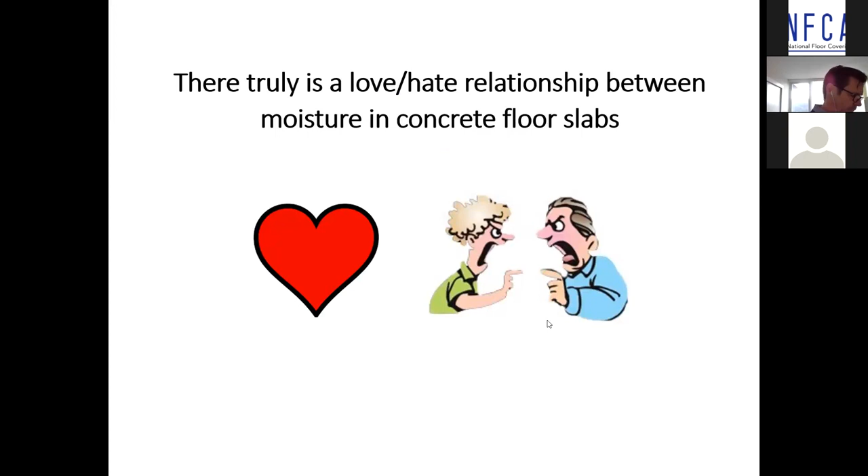Here to talk to you about the love-hate relationship between moisture and concrete floor slabs. There really is a love-hate relationship between the two. So let's first talk about the love.

We love and we need moisture in a concrete floor slab. Why? We need moisture to hydrate or harden the cement particles in the mixture. We also need water to render a concrete mixture workable, placeable, pumpable, finishable. And we need moisture or moisture retention to effectively cure a concrete slab.

Unfortunately, we have also learned to hate the very same moisture in concrete floor slabs. Why? Because moisture that's within the slab or departing from a slab can result in a vast number of undesirable conditions. On the left, you see mold growing underneath a vinyl composition tile.

You can see adhesive breaking down beneath a carpet tile installation that was out in Oklahoma, slab curling, and so on and so forth. And I'm trying to move that, Chris.

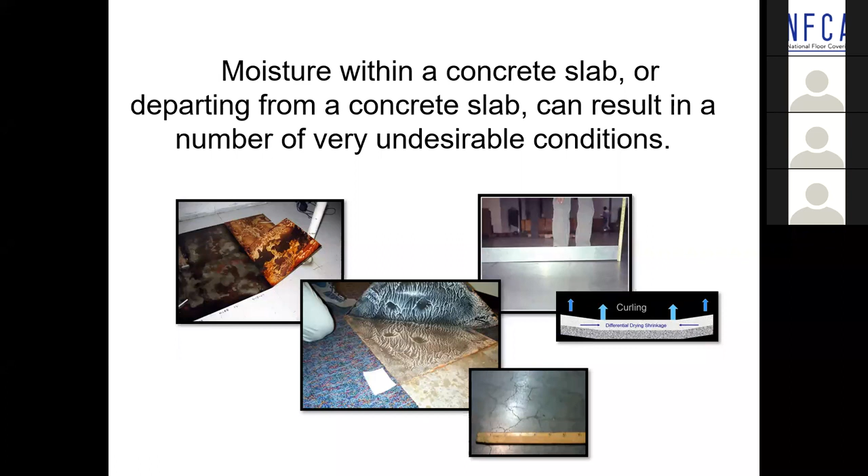One of the worst problems for the floor covering organization, its members, manufacturers, installers, and owners as well, are the negative problems that moisture can have on floor covering and coating.

On the left, you're seeing delamination of a flooring system that was down in Pennsylvania. The shot in the middle is a health clinic down in Fort Lauderdale, Florida, where the adhesive is broken down.

It's literally swimming. Now, when most people look at that picture, what do they say? They say the adhesive is reemulsified, but I want you to know that is not always an accurate statement.

We took water-based adhesives and coated stainless steel strips of metal. If you allow the adhesive to achieve its proper degree of set, and then immerse that coated strip of stainless steel into pH neutral water, pH 7, neutral distilled water, it doesn't reemulsify.

I'm getting some background noise from somewhere. You take that same specimen and put it into pH solutions 10, 11, and 12, and you begin to see it slide off the metal, giving the appearance of reemulsification when it's really breaking down, not necessarily reemulsifying just because there's water there.

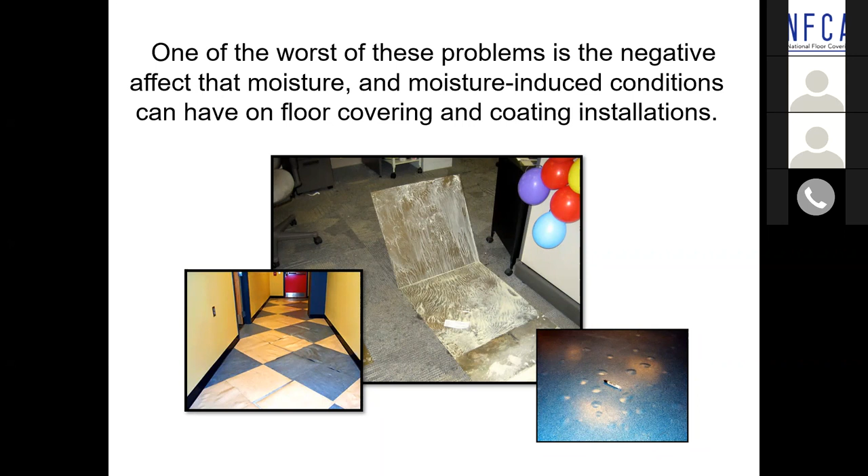And the bottom right picture is an epoxy floor. It's not only the coating of flooring materials or flooring industry that's experiencing problems. The polymer industry, people who manufacture and install epoxy floors, urethane floors, methyl methacrylate floors, are having very similar issues with moisture.

So, because concrete loves and needs moisture, let's take a few minutes and talk about concrete. What is it? Basically a composite material comprised of four basic components: water, sand, stone, and cement. This mixture of four ingredients, done properly, hardens to produce a stone-like material.

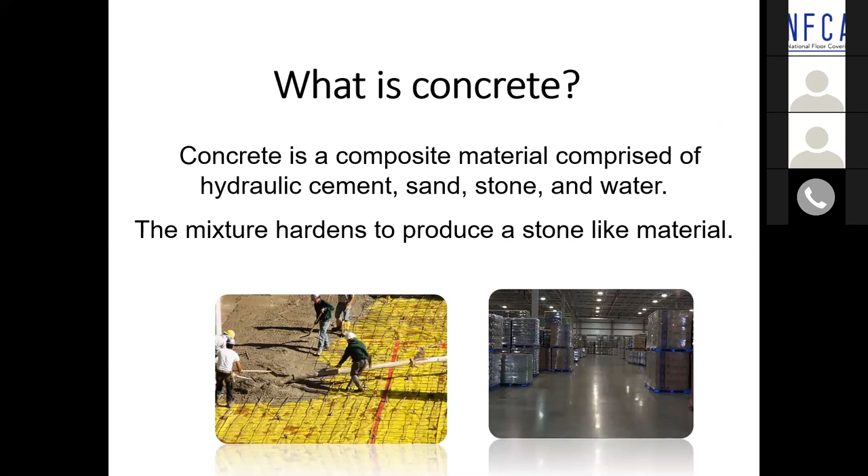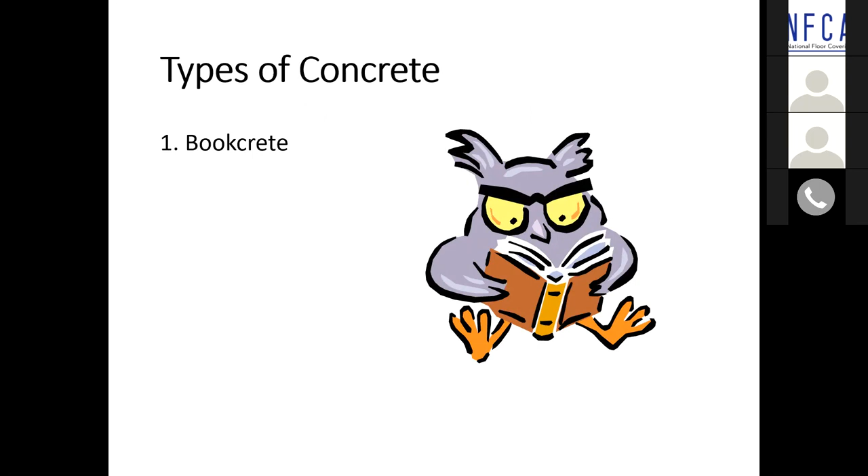Pretty simple explanation. There are, however, four types of concrete. There's the concrete that you read about, hear about, and study. There's the concrete that designers and researchers can create in the laboratory.

And then there's the realcrete, which sadly can sometimes differ significantly from what the design mixture was intended to be or what we were hoping it to be. But there's another type of concrete. The fourth type is the type nobody wants to know about, nobody wants to experience, and that's called legalcrete.

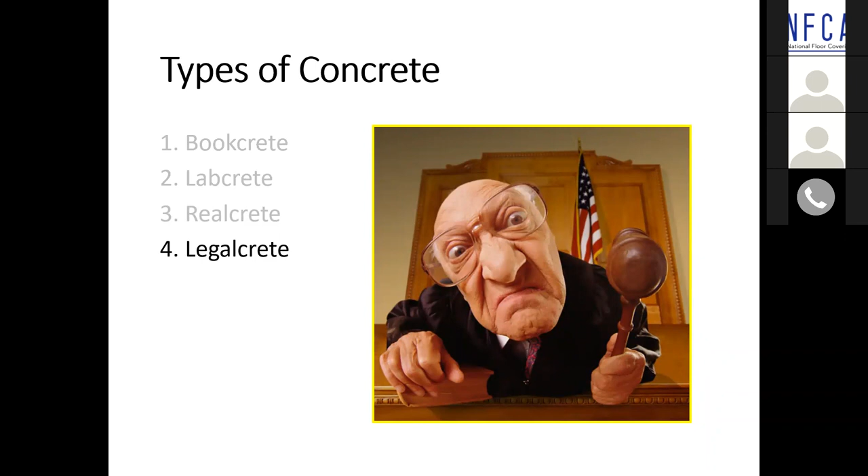I am now a one-man consulting firm. I had over $80 million worth of flooring lawsuits over concrete slabs in just the last 2 years alone. It's estimated that this issue is a $300 million to $1 billion issue in the United States alone. Add Canada and other parts of the world, and it's still a very, very huge issue.

Now, we need the water. We love the water because if we didn't have water, moisture in concrete, concrete wouldn't become concrete. We need it for hydration. Without moisture, water, and concrete, the cement particles wouldn't harden. Without water, we couldn't get the stuff out of the truck. It wouldn't be workable, it wouldn't be placeable. We couldn't pump it, and we certainly couldn't finish it.

And curing, the last thing. Curing, by definition, is the maintenance of temperature and humidity for a specific period of time in order for the concrete to achieve its design physical properties.

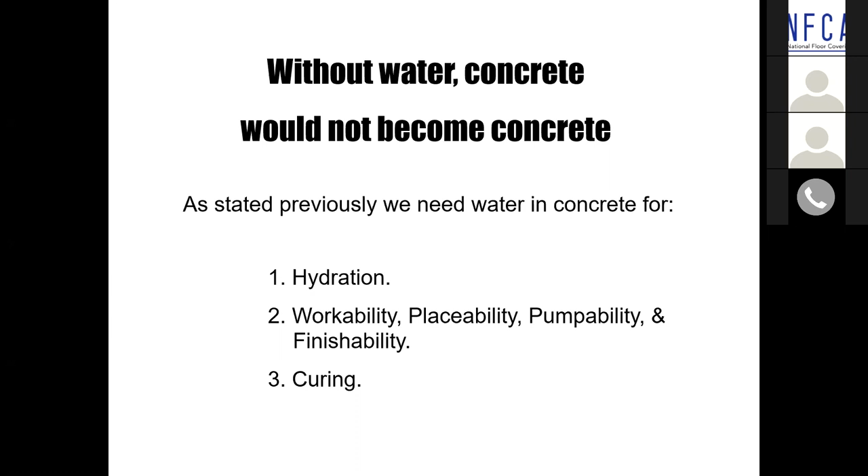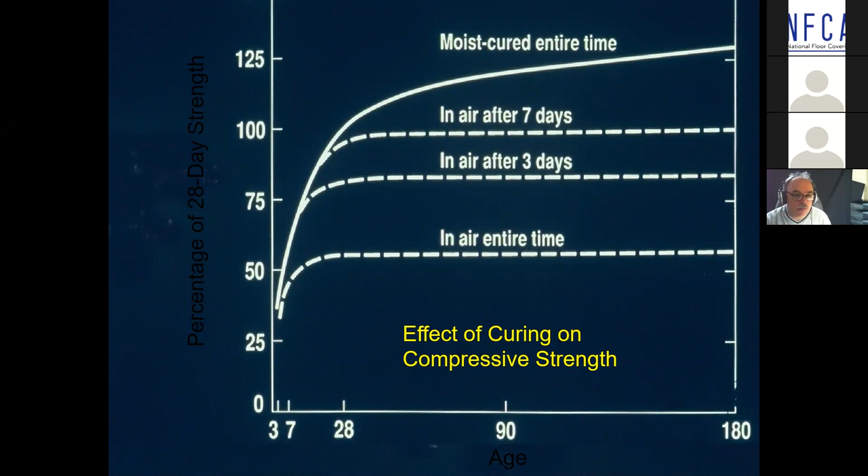This is where the idea of a 7-day curing period comes from. If you properly cure concrete by one of a number of methods we'll talk about, and retain that moisture within the slab for a period of 7 days, you will ultimately achieve 100%, or close to 100%, of its design physical properties, without question.

Now, what are the methods we use to cure concrete? Well, if concrete could vote, it would jump up and down to be water cured. But water curing, while a very effective method, isn't easy to do, isn't always practical, particularly on elevated slabs. And you absolutely have to avoid alternating wetting and drying.

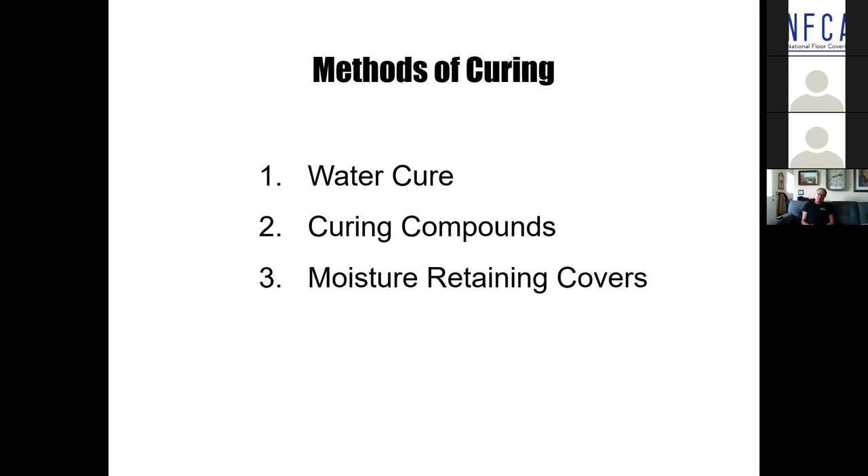I'm still of the opinion, because I've seen it happen, that when hydration takes over in the summertime, the temperature of that slab after it's finished can reach 120 to 130 degrees Fahrenheit. You hit that with 55-degree water out of the ground, and I've seen it craze and crack the surface of the slab.

So water curing isn't always the most practical way for curing slabs that are going to receive a floor covering or a coating system.

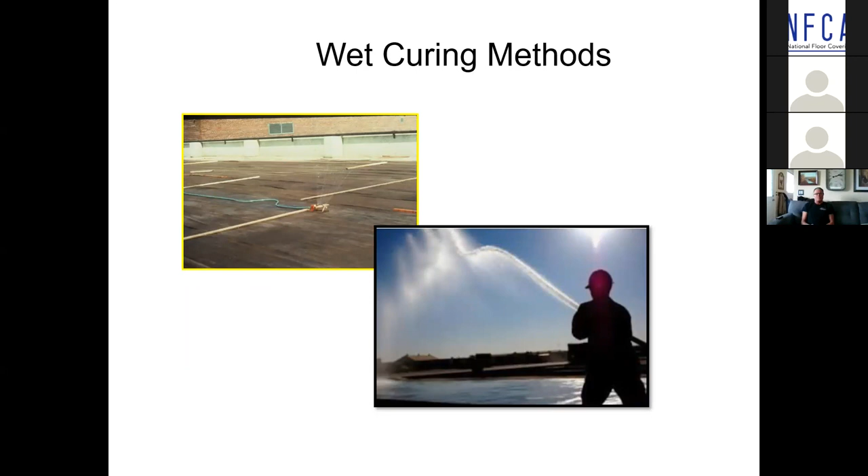Curing compounds: when I grew up in this business 45 years ago or more, curing compounds were the norm, particularly membrane-forming curing compounds. Why? Very inexpensive, very easy to apply, and they accomplish the curing. However, the ASTM F710 standard practice for preparing concrete subfloors to receive resilient floor coverings doesn't say not to use one, but it does say it's got to be removed, and that's very costly to remove.

Now, there's a class of curing compounds referred to as dissipating, but they don't just break down overnight. It takes ultraviolet light, takes abrasion. It could take 60 to 90 days for it to actually break down. As you're constructing the building and framing out the floors, anywhere there isn't significant traffic, that residue is still on the surface.

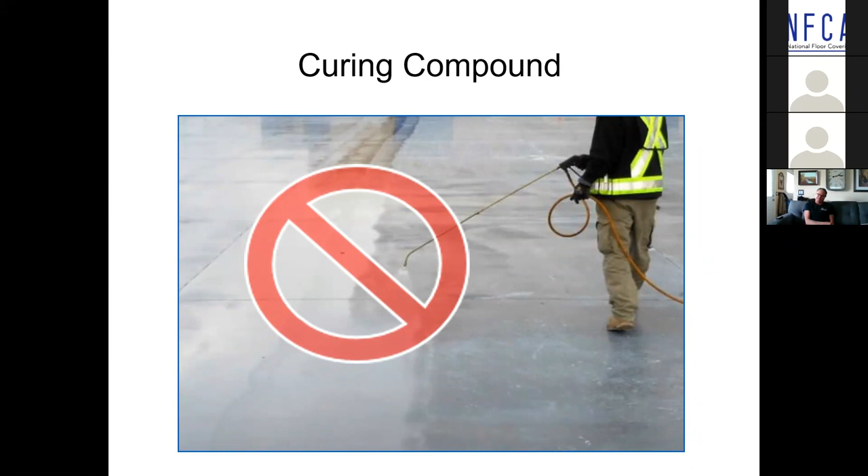So ideally, if you know ahead of time this is a floor that's going to receive a floor covering or coating, in my opinion it's far better to consider the third class of curing methods, which are basically just moisture-retaining covers. I've used dry, wet-strength curing paper for years.

It's also used in the more arid regions of the country, or in hotter, windy conditions. It's a composite material of fabric and poly where we just wet the underside of the fabric, dampen the surface. You're not continually adding water—it's a one-time thing, and it works very, very nicely.

And the newer materials are lay-flat. Not that it's necessarily important for a floor that's going to get covered, but if you have a bare concrete floor and use regular poly with wrinkles, you end up with a mottled appearance on the slab, which is very undesirable and you can't get rid of it. So these new materials are lay-flat, though again, aesthetics aren't as important when we're going to cover it.

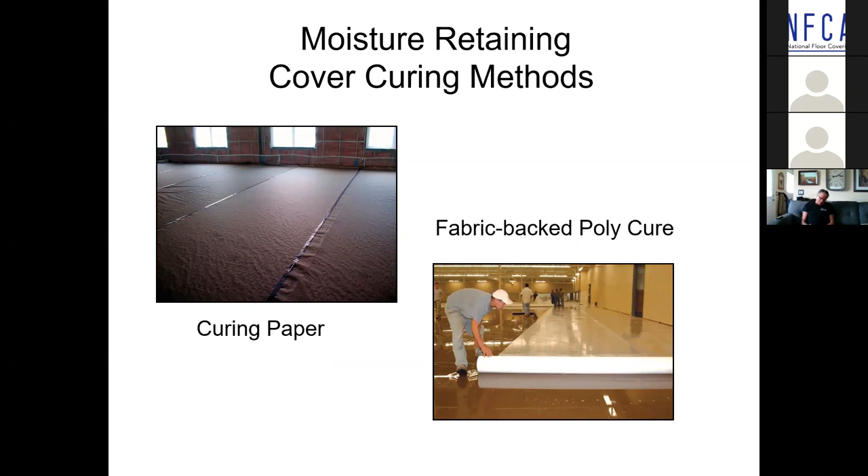So yes, we love and we need moisture for every one of those reasons. Okay, we've got to have it. We need it, we've got to have it.

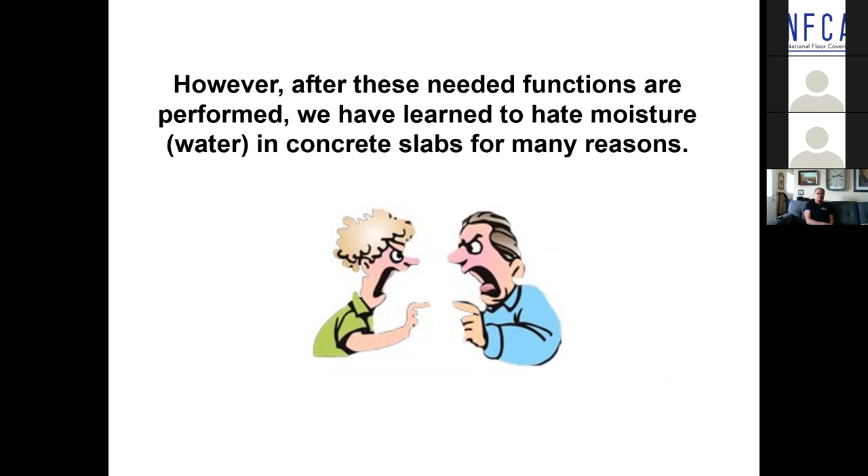However, after these functions have been served or performed, we've learned to hate that same water, that same moisture, for a lot of reasons. One, it can lead to very serious problems with floor covering materials and coatings.

The loss of moisture from a slab can lead to volumetric changes. Only half of the water in a yard of ready-mix concrete is necessary to hydrate the cement content. There is always free water, or water of convenience, in a yard of concrete to make it workable, placeable, pumpable, and finishable. If you only put in the amount of water necessary to hydrate the cement, you couldn't get the stuff out of the truck, and if you could, you couldn't do anything with it. So that free water occupies volume, and as it's lost through evaporation from the surface, a volumetric change takes place. This shrinkage can lead to cracking and to warping or curling of a concrete slab.

Moisture in concrete can also, if potentially reactive aggregate particles are present, feed a process referred to as alkali silica reaction, or near surface alkali reaction. These are aggregate particles that really shouldn't be in the concrete mixture, but it happens all too frequently. When those potentially reactive particles exist and there's at least 85% moisture in the slab, it's like fueling the fire. Ultimately, when ASR exists, a gel forms around the coarse aggregate particles, and that gel is expansive. It can take 5 to 10 years for it to begin to crack the concrete, but it does happen. We've also identified a similar condition with fine aggregate, occurring in a matter of months, called near surface alkali reaction, or NSAR.

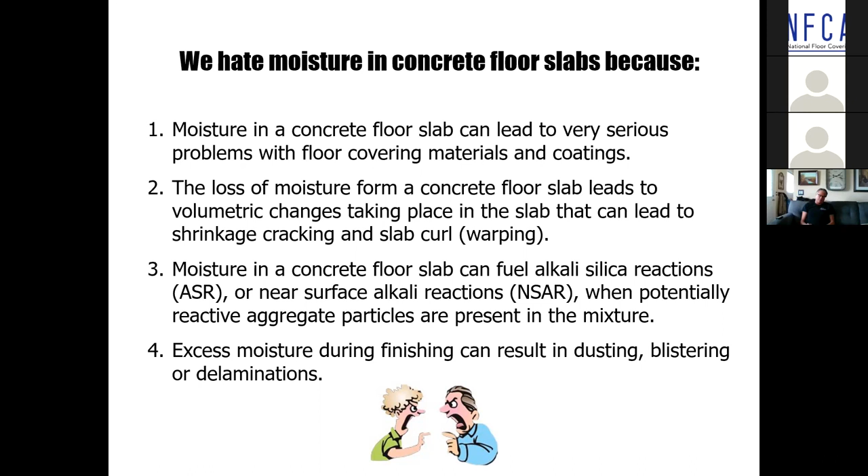Excess moisture during finishing can result in a slab that's dusty. It can also contribute to blistering and delaminations in the slab surface. I have two schools right now in Massachusetts where both have serious issues with delamination. I also have a 7-story hospital in Tucson, Arizona—7 floors of lightweight concrete, all delaminated half to three-quarter inches.

They've already spent $4.6 million dealing with that issue down in Tucson. So it's a huge issue. All right, let's take a look. Since we're doing this as a flooring organization, let's look at some of the common types of moisture-related floor covering and floor coating issues.

Why is that? It's the natural bleeding process. When you study the specific gravity of the four basic components in concrete, water has a specific gravity of 1, cement has a specific gravity of 3.15. What does that mean? In absolute density, cement is 3 times heavier than water. Your aggregates fall in the 2.65 to 2.85 range. What does all that mean? It means when those four components with four different specific gravities hit the ground or the deck, the heavier particles settle ever so slightly, and the lighter element, water, bleeds to the surface—but it's not pure water.

That water that rises to the surface—those of you who've placed concrete or seen it placed have seen that bleed water—but it's not pure water. It contains any chemical or admixture that's in the concrete, plus soluble alkalis. That's why, in every test ever done, you see higher levels of sodium and potassium ions in the top 3 millimeters of the concrete than you do deeper in the core. It's those alkalis that, when they go into solution, raise the pH of the concrete to a level that can begin to attack and break down the adhesive, and so on.

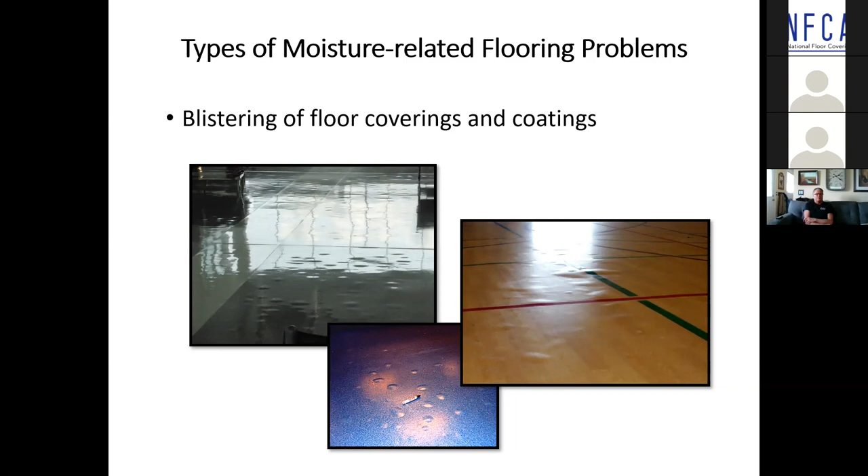An osmotic cell that develops in the surface region of concrete can reach 200, 300, 400, 500 psi, to the point that it can actually fracture the surface region of the concrete. Both of the pictures on the far left and the bottom show osmosis occurring in polymer flooring, and on the right side you're seeing osmosis that occurred because there is an epoxy system underneath that vinyl floor made to look like maple.

Delamination of floor coatings. This shot was a facility that first produced scanners for the airports after 9/11, a former Lucent Technology facility. They tested and the moisture levels were unacceptable, so they bought into putting down a 2-part epoxy moisture mitigation system. They started shot blasting the floor, 200,000 square feet, doing 15,000 feet at a time, moving across section by section.

As they moved across, the epoxy mitigation system went down, followed by a high build static dissipative epoxy. By the time they were about 90,000 square feet across and the first area was done, the operator was in there snapping chalk lines and setting up equipment, but brought the contractor over and said, what are all these bubbles? Time out, stop the process, start the investigation. But there wasn't time to do a proper forensic investigation.

All of that existing coating that was down had to be taken up, and another system was put down. That system got the facility open, and it was so critical because the government was serious about producing these scanners - if that facility wasn't open and producing scanners by a given date, the penalty was $400,000 a day. So they put this other system down.

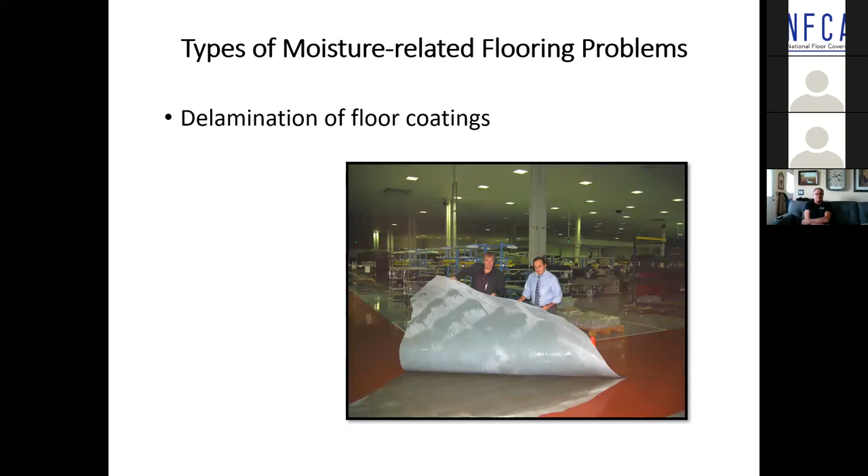The first company's system failed. They stepped up to the plate and wrote a check for $600,000. You learn a lot about who you're doing business with when you have a problem.

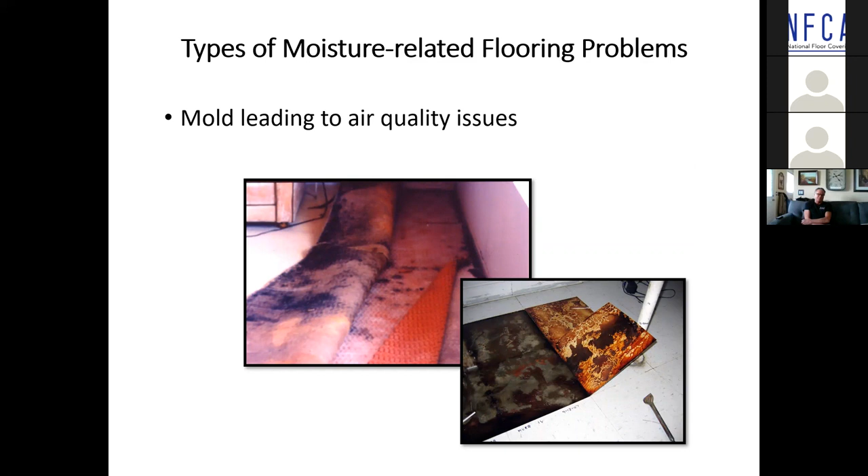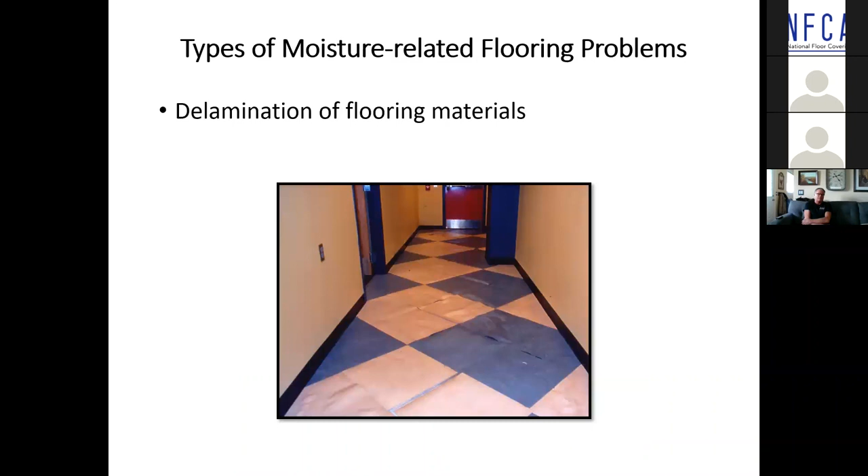Moisture can contribute to the development of mold, which in turn can become airborne and affect people's health - a very serious issue. Moisture alone can cause flooring materials to expand and delaminate. Here's a classic example - this is that same picture you saw a minute ago where you see raised blisters in a sheet vinyl made to look like maple floor.

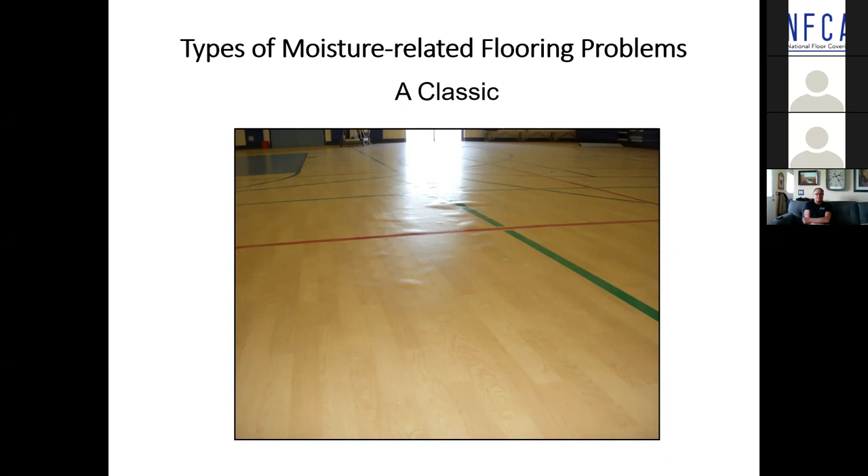What's interesting, my colleague, when we see these blisters, we typically find them to be fluid filled. What we would typically do is puncture that blister, take a syringe, draw the liquid out, put it into glass bottles with steel caps, wrap it in aluminum foil, and send it to the lab for chemical analysis. We did that, but my colleague couldn't resist it. He said, quick, grab the camera. And we call this Old Faithful.

It's not Photoshop. But the company who sold the mitigation system did something similar and used it in the lawsuit. This is one of the very few lawsuits that became a matter of public record - 95 out of 100 lawsuits that we get involved in, myself or other firms, you end up agreeing to non-disclosure in the settlements, so we can't talk about it. This one actually became a matter of public record, was in the newspapers, and so on. But the company who sold the mitigation system used a similar picture saying, we don't warranty for hydrostatic pressure.

In my deposition, when I heard that statement read to me, I said, what are they talking about? Hydrostatic - this was in Bakersfield, California, up in the mountains. The water table was several hundred feet below the surface of the facility. They didn't have 2 inches of rain the entire year. It had absolutely nothing to do with hydrostatic pressure. That company, who installed two different systems, this floor failed twice before it was properly corrected. They lost that lawsuit, and it became a matter of public record.

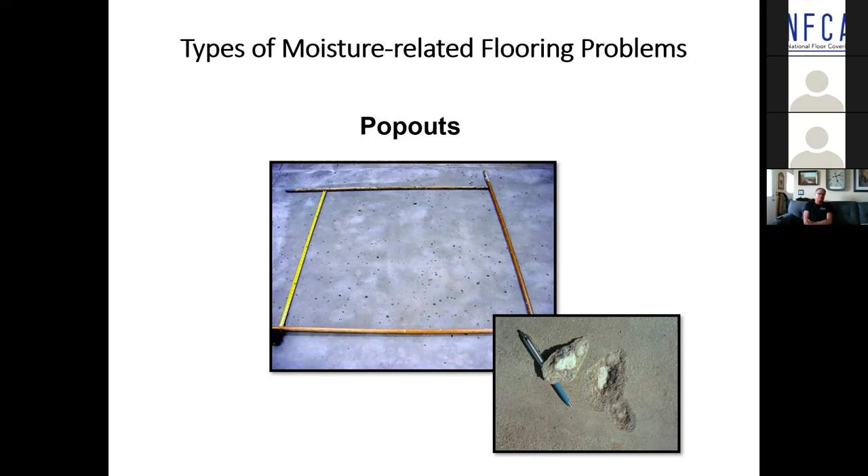Huge thing. We just talked about ASR and NSAR. I'm not going to go further into that.

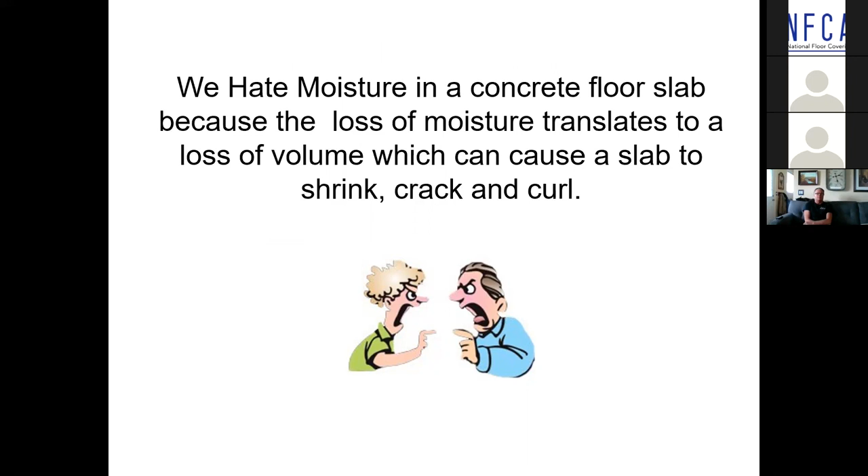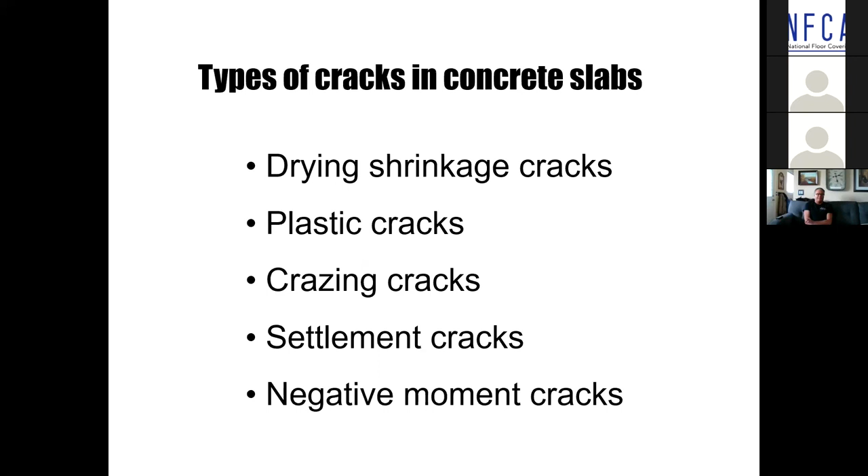We hate moisture in a concrete slab because the loss of moisture can create a volumetric change, and that can result in drying shrinkage cracks, plastic cracks, crazing cracks, settlement cracks, and negative moment cracks. Drying shrinkage is simply the loss of moisture; if there's no provision for it, the loss of volume creates a volumetric change, and the friction of the deck or the friction of the ground can cause the concrete to crack.

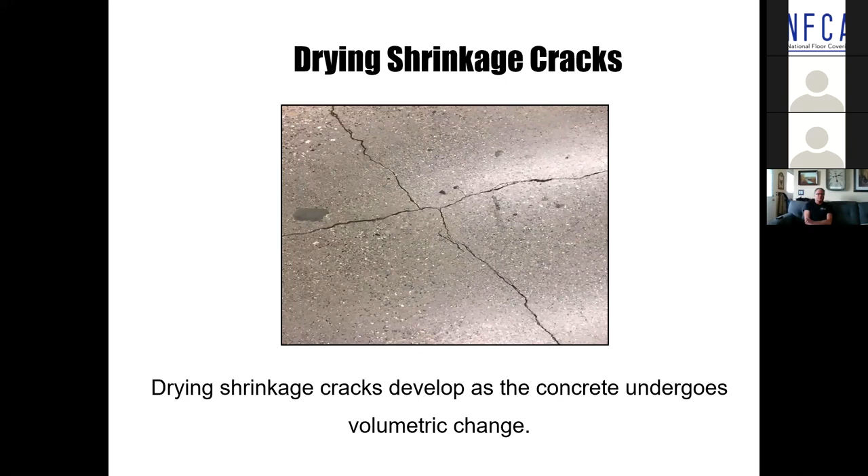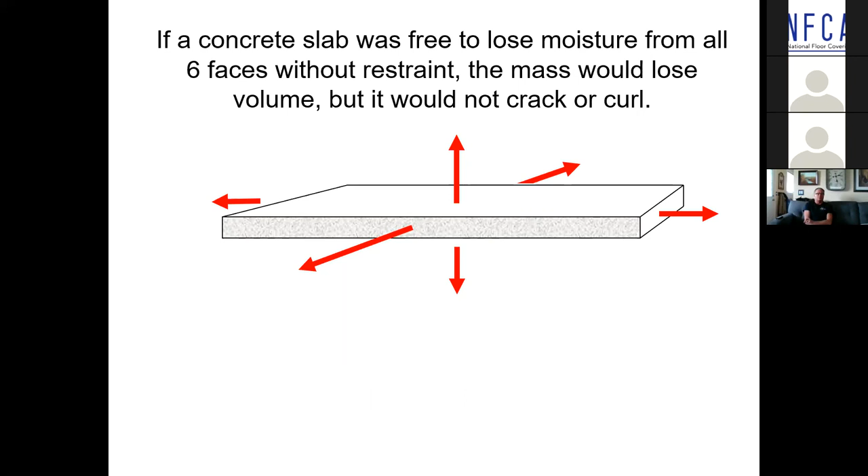Now, if you had a concrete slab that you could levitate into space such that it was free to lose moisture from all six sides, there would be no internal shrinkage stresses that would result in cracking. But because we place these slabs on the ground or on deck, there's the issue of frictional restraint. Even if we're on plastic, ultimately there's a measure of frictional restraint that can lead to a crack.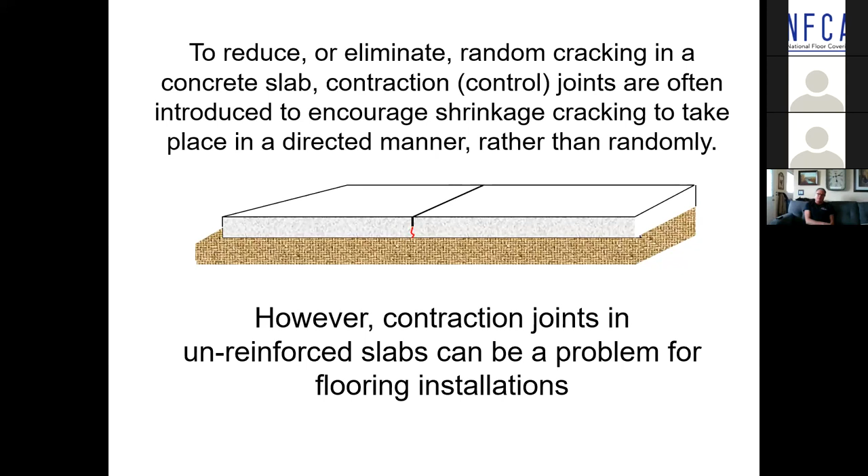So what do designers typically do? They typically put into the design control joints, contraction joints, saw cut at a given spacing. The problem is that if they haven't done their due diligence in understanding what can happen to a moving joint, or a joint that moves underneath the floor covering, it can be a real problem for a floor covering installation.

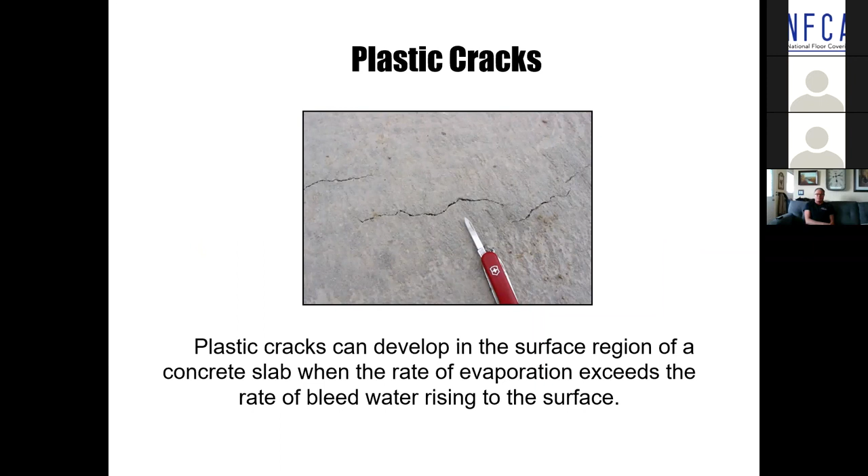Plastic cracks occur very quickly, while the concrete is still in a wet plastic state. You get a hot, dry climate with wind, and the moisture evaporating from the surface is not being replenished by the bleed water, which can lead to superficial plastic cracks. There are ways today very easily for a finisher, a GC, or a project manager to know whether they're at risk.

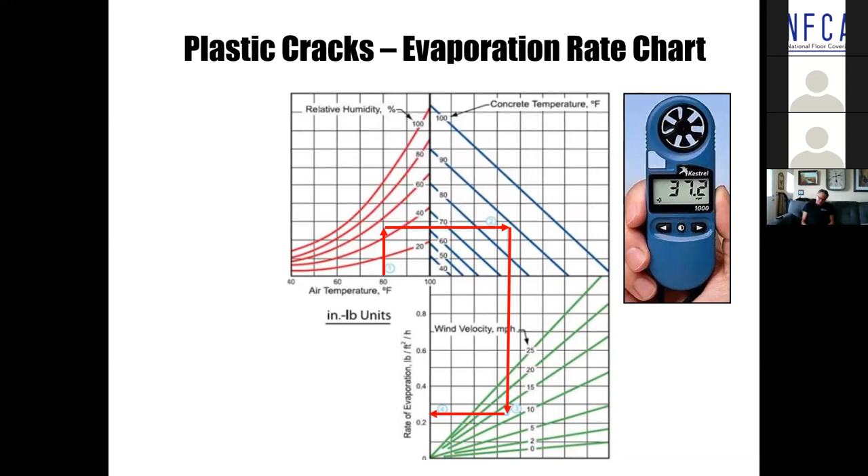You take the air temperature, compare it to the concrete temperature, measure your wind with this little handheld unit, and you can tell whether you're at risk. And there are things you can do. There are monomolecular films, not curing compounds, that you can spray on the surface to minimize the potential for plastic cracks to develop.

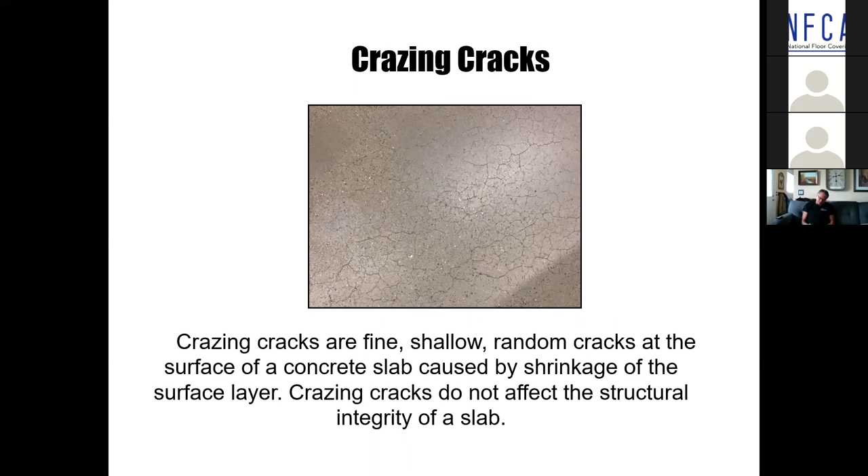Crazing cracks are not necessarily a defect. They're very unsightly, and a lot of owners panic when they see a crazed surface, but some of the best slabs I've ever seen in my life have been in place for 50 years and have that type of pattern.

Settlement cracks occur when the rebar is not properly positioned. Guys are walking on it while the concrete is beginning to set, walking on the rebar mat, and you can get a crack over the rebar. And it's very common for negative moment cracks to develop on elevated slabs where there's flexure in the decking itself, and you get a fixed object like a beam or a joist, you can end up with a crack over the top of the slab.

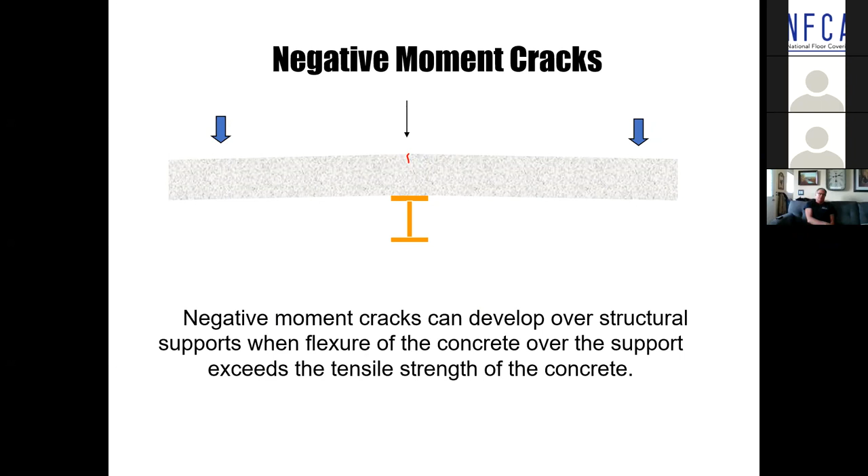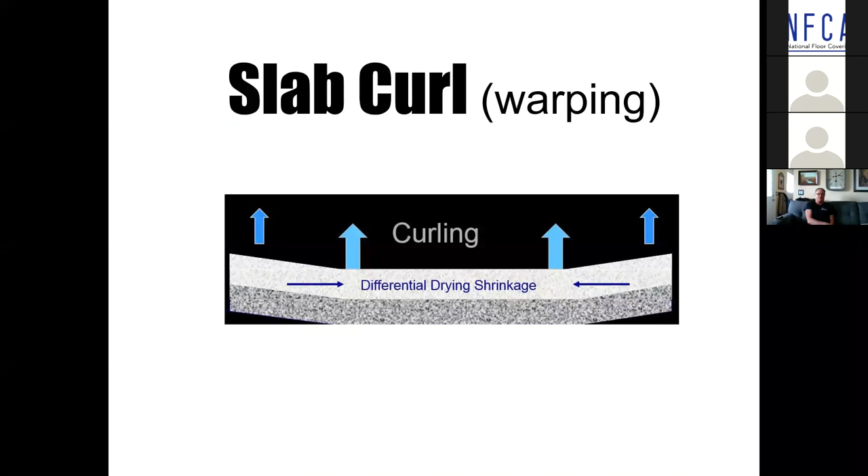It's important to know which type of crack you're dealing with, as I'll show you later on. Probably the biggest concern, in addition to cracking, is slab curling.

Remember, this mass of concrete that's on the ground, here on a vapor retarder, half of the water in that concrete slab is not chemically combined and is going to leave over the course of time by evaporation. As long as that surface is open and continues to lose moisture, volumetric change is occurring at a greater rate in the upper half of the slab than in the lower half of the slab.

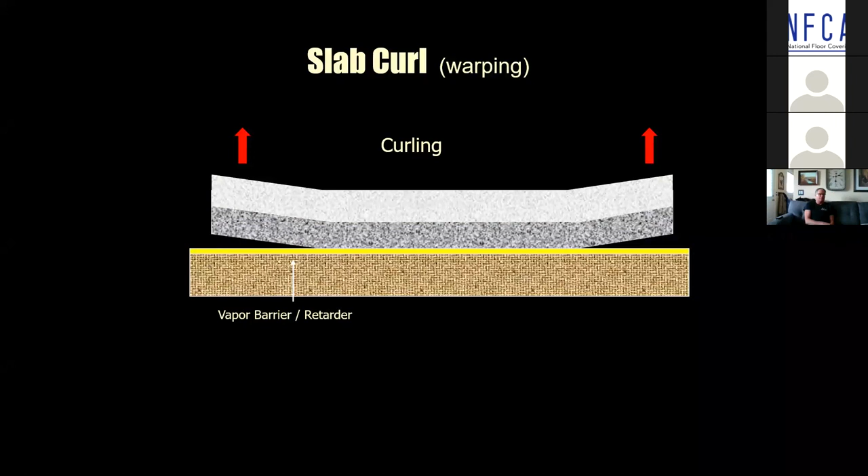And when this happens, the edges of the slab, usually about 3 to 4 feet each side of the joint, warp. It's a huge issue. How do you know if the slab is curled? Let's say you're doing a gymnasium.

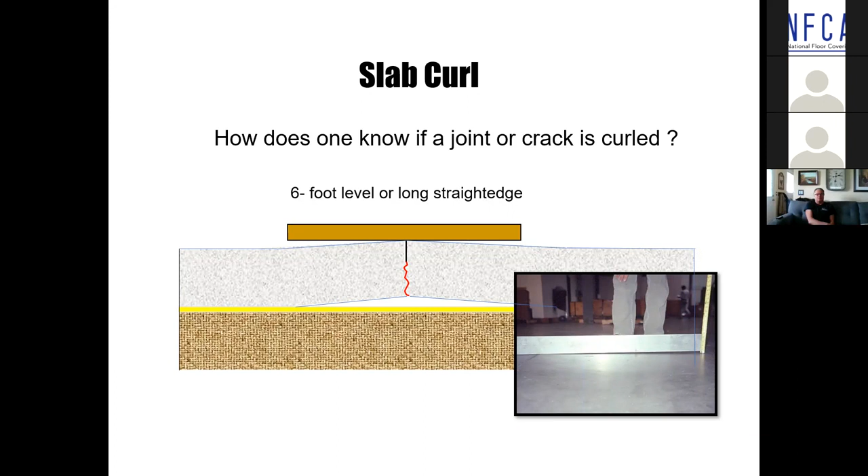You're the flooring contractor, and you're going to put the floor down in a gym. The concrete contractor finished the concrete, and it was measured and met tolerance. You come in six months later, and you put a straight edge over that joint, and guess what? The joint is now the fulcrum, and that six-foot level is teeter-tottering across that joint. You inherit that condition, and unfortunately you had absolutely no control over it, and maybe the concrete contractor didn't either. It's a design issue in most cases.

The stresses subside and it puts whatever's in the joint, whether it's a joint filler or semi-rigid material, into compression. You can see it in all three of these pictures, where the slab sections that were curled at the joints have now gone back down and put what's in it into compression. Here's what it looks like.

What's the standard treatment? More often than not, people come in, if they've checked the slab and it's curled, they grind the surface level, or in some cases use a leveling compound. But they forget or don't consider that if the joint is raised up, there's a void underneath that slab—a hollow area. Again, only back several feet each side of the joint, but it's hollow.

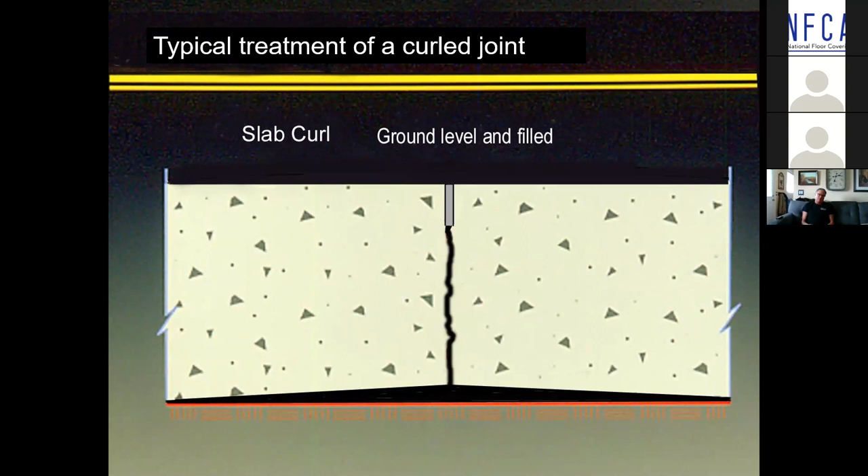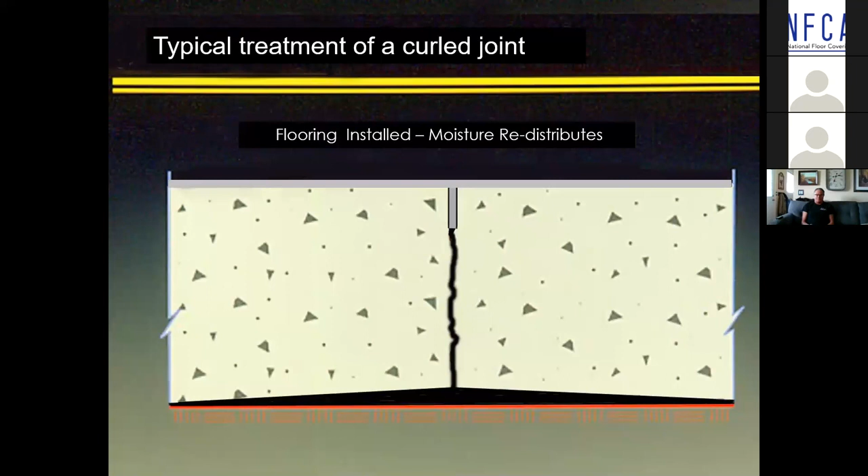Now you come in and put down a flooring or a coating. Moisture is always attempting to seek a state of equilibrium. And as it attempts to seek that equilibrium, it redistributes. As it redistributes up into the drier portion, the warping stresses subside, the slab sections go down because they're not being supported underneath, and it puts whatever's over that joint into compression.

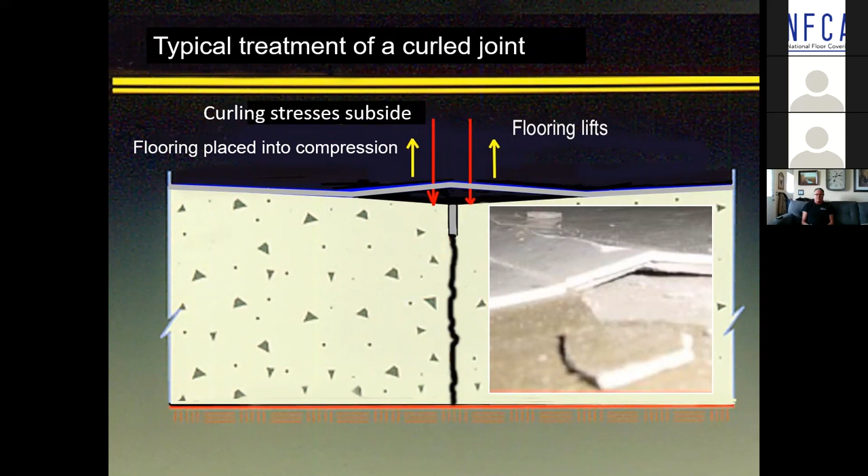Here's the worst case, where it completely buckled the underlayment and the flooring material. Same thing here—compressible floor material in the joint. Put it down, moisture redistributes, and all the joint lines telegraph through the flooring. A lot of you have seen that and may not have known it was related to the condition referred to as reverse curl.

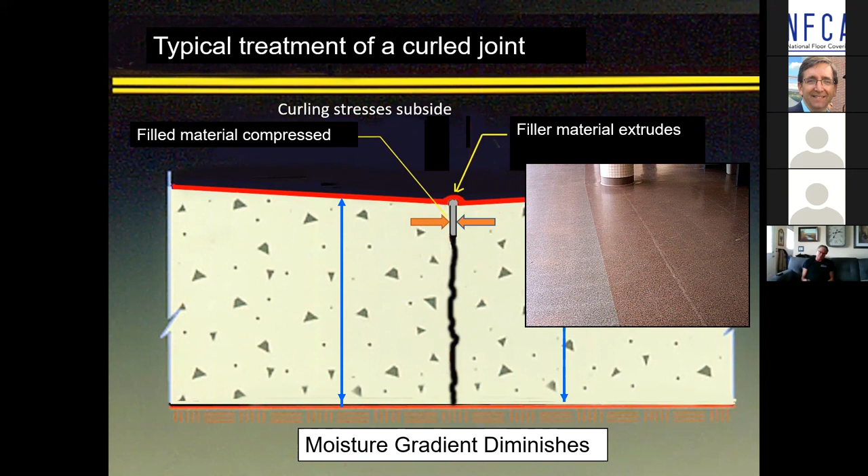It's a great opportunity—I can show you how to stabilize a curled joint in relatively no time at all, and a great opportunity for you to make additional money if you choose to do that. But please be aware, if you're going to put a flooring system down and you run that level across those joints and it's teeter-tottering, just grinding it level or leveling it with an underlayment material isn't necessarily going to solve the problem.

So it is absolutely critical to know how much moisture is in that slab and whether the level of moisture in the slab is going to increase or decrease over time, which leads us to how we make that determination: moisture testing.

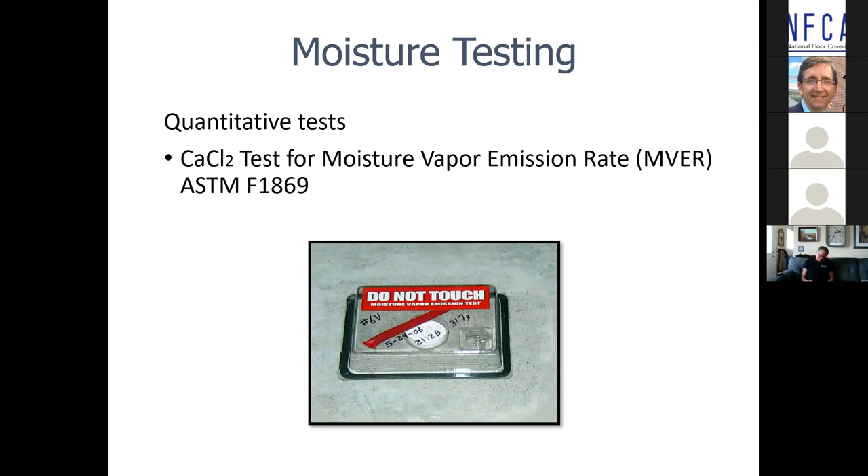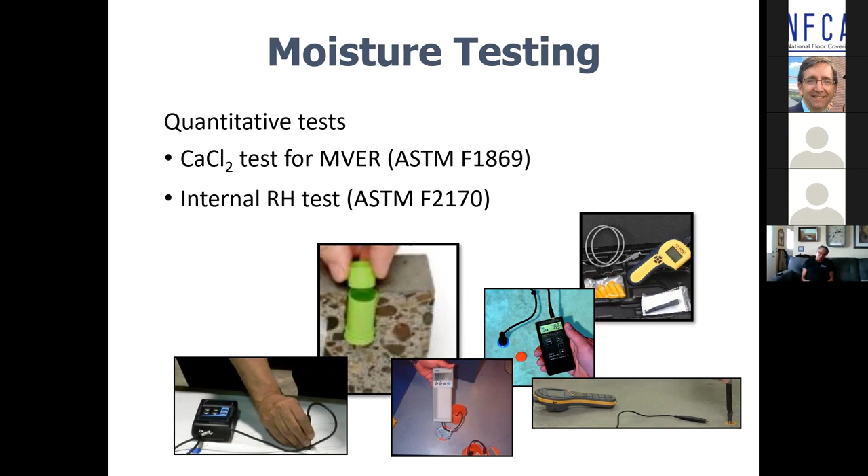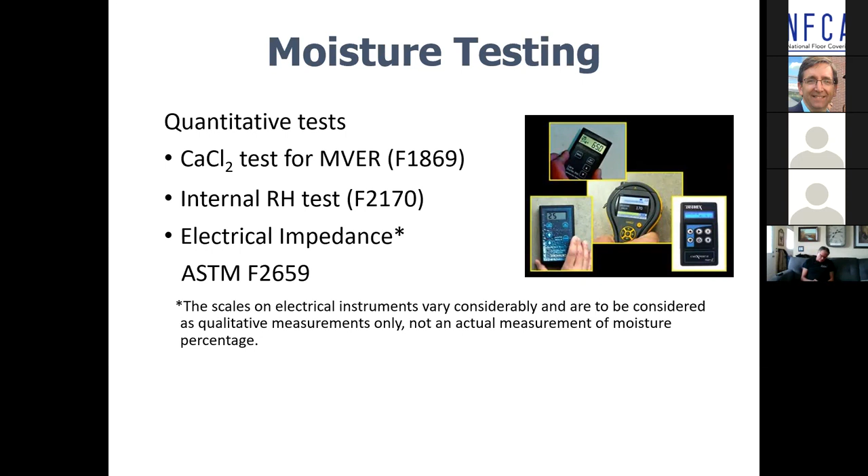The tests we perform for moisture fall into two categories: those that give us a number, and those that basically just tell us whether it's wet or dry. On the quantitative side, historically used for decades—going back into the 30s and 40s in its crudest form—was measurement of the moisture vapor emission rate by the calcium chloride method. In 2002, in the United States, we adopted the European method of measuring moisture in concrete floor slabs, ASTM F2170. We also introduced relative measurement of moisture by electrical impedance, ASTM F2659. Let's talk about the qualitative side.

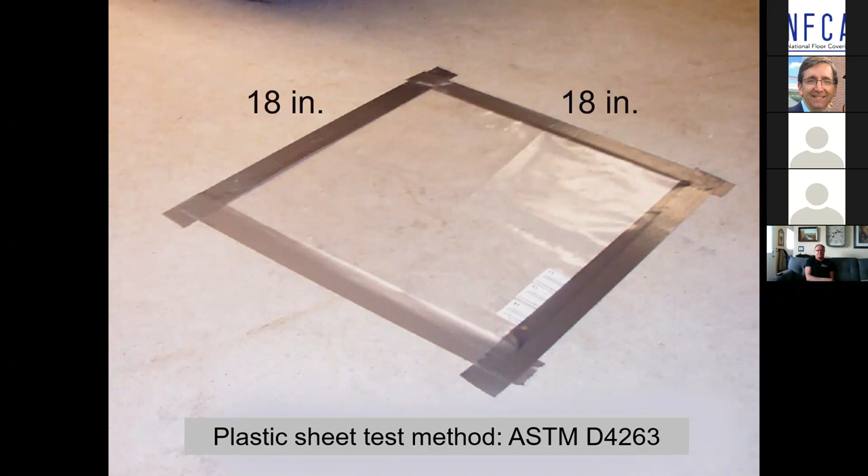For years, taping down a sheet of plastic over the slab has been used, and it's still a practical method of determining if something is wet or dry. It calls for taping down an 18-inch square piece of plastic, leaving it down for a minimum of 16 hours or longer, coming back, peeling back a corner, and seeing if you see a darkening of the slab or droplets of water on the underside of the plastic. If you see moisture under the plastic, do you put the floor down? Absolutely not. If you don't see moisture under the plastic, do you put the floor down?

Absolutely not. So what good is it? Well, here's a test that a general contractor can perform on their own.

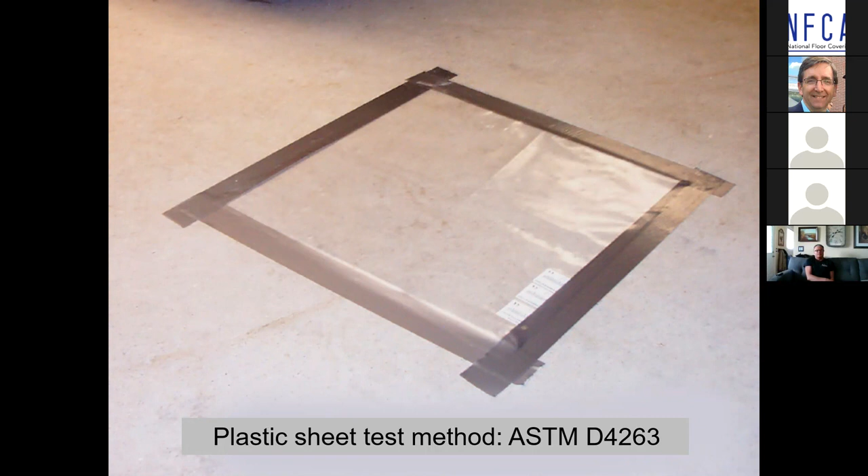Go out every week and put down a separate piece of plastic. Don't even think of calling anybody in to test the moisture until you stop seeing droplets or darkening. Why? It can take up to 13 pounds of emission to even show up under the plastic. So if you're seeing drops of water under the plastic, don't call in whoever is going to do the moisture testing, because you're just wasting your time and wasting somebody's money.

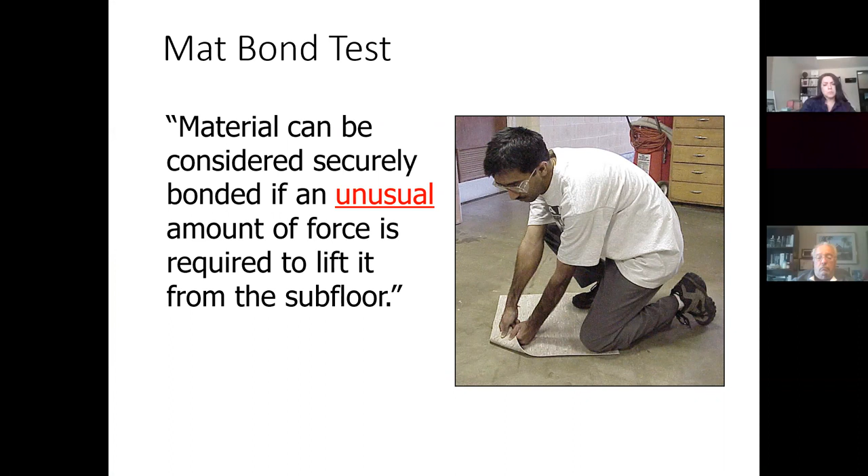Still on the qualitative side, we're actually at ASTM writing a new mat bond test where basically you prepare a mock-up of the concrete exactly as you're going to for the full project, clean it, prep it, vacuum it, spread adhesive, put the flooring down, roll it, let it sit for usually a week, come back, and see if an unusual amount of force is required to lift it from the subfloor. Well, unusual to who? There are ways of quantifying it that we use, but we'll see what the new standard comes up with.

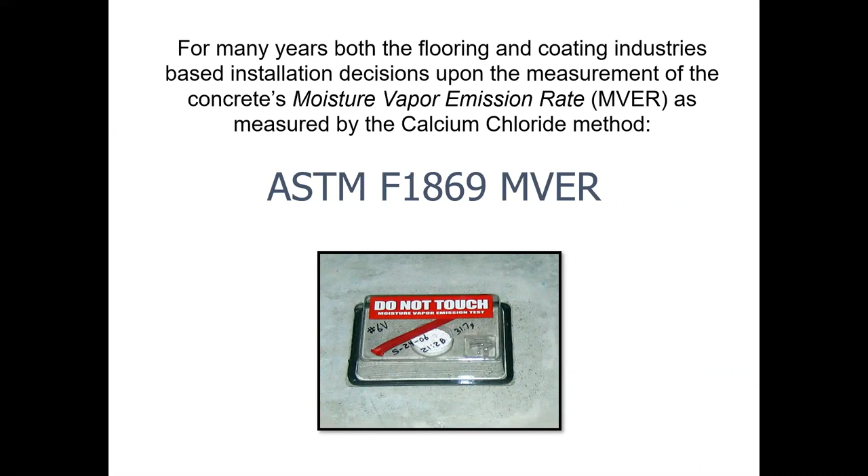Let's talk about calcium chloride testing and why it's fallen out of favor. It absolutely was the norm for decades and decades and decades. But what we've learned about it has caused us to accept that, quite honestly, if this is the only test you're asked to perform, or the only test you do perform, it's insufficient information to base the flooring installation upon.

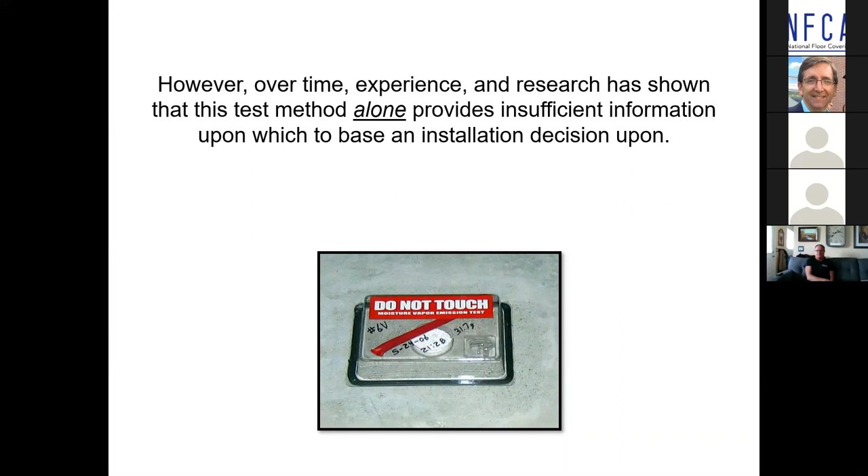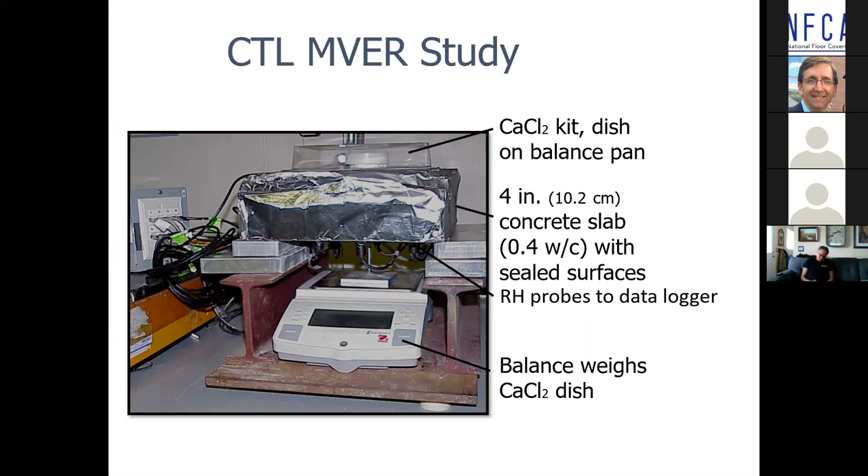Why? It's only telling us what's taking place in the top half to three quarters of an inch. This is a study that my friend Howard Kanare and my colleague Scott Tarr performed years ago when they both were at Construction Technology Laboratories in Illinois, where they took a 4-inch concrete slab and had humidity sensors embedded into that slab.

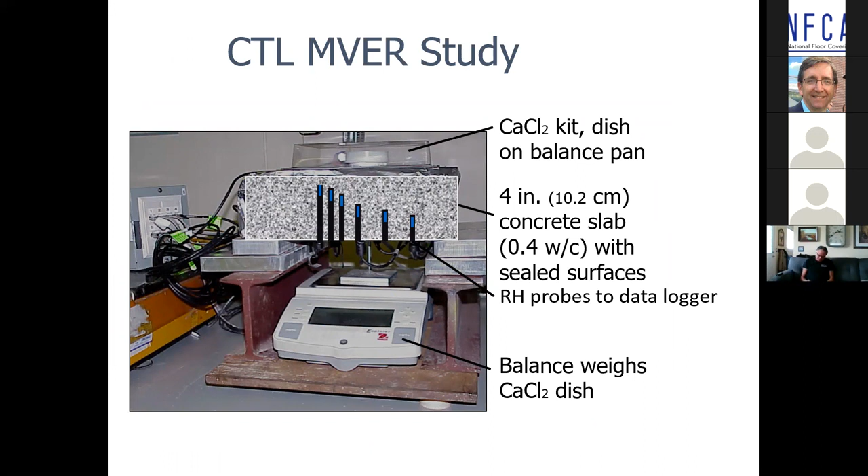What they were trying to do was determine where the moisture that you could see on top of the slab, a dish of calcium chloride pearls underneath a plastic dome, was coming from — either by emission or hygroscopic action. Where was it coming from? What they found was that it was only the top half that changed; nothing changed beyond three quarters of an inch into that concrete. So conducting a calcium chloride test is really just the tip of the iceberg.

I think it's still a valuable test. Alone, it's insufficient, but as a consultant, I want as much information as I can possibly get. If I'm asked whether it's safe to put a floor down, I want as much information as possible. But it doesn't tell the whole story. Underneath that surface is a potential reservoir of considerably greater moisture that the calcium chloride test tells us absolutely nothing about.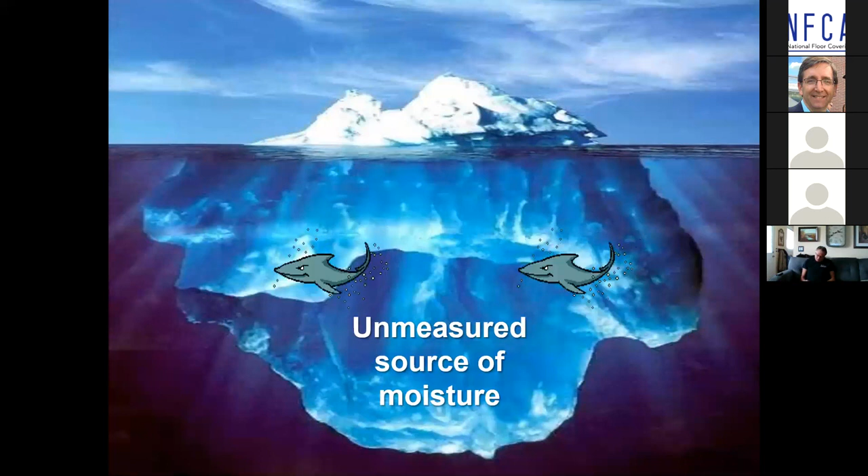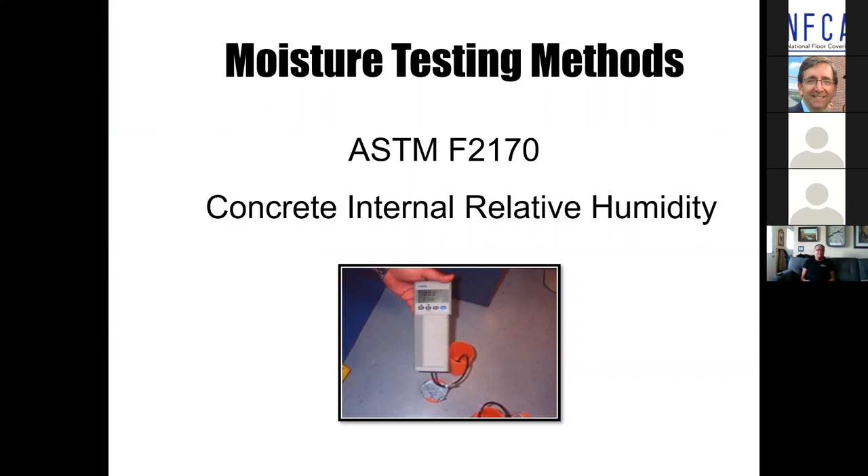That's why we adopted the European method. Most Europeans don't use calcium chloride — they have a calcium carbide test — but relative humidity testing is the norm and has really become the norm, at least in the United States. When that concrete hits the ground, day one, it's 100% relative humidity, top to bottom. No question about it.

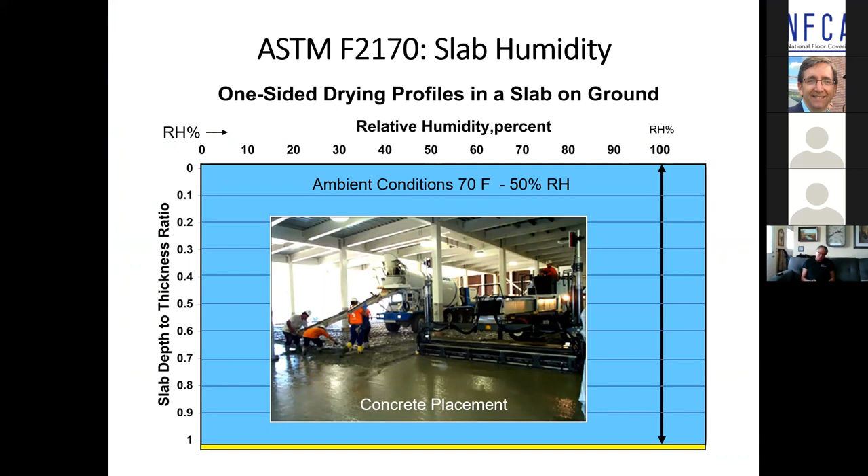Here we have an ambient condition of 70 degrees Fahrenheit, 50% relative humidity. So now, over the weeks and months that follow placement of that concrete — and I want to make a point here — all of these moisture tests presume there is an effective, low permeance vapor retarder directly underneath the concrete. If it's not there, the numbers you get are all subject to change. So with the vapor retarder in place, directly in contact with the underside of the concrete — not below sand or gravel, it's got to be directly under the concrete.

Ultimately, the surface region of the slab will equilibrate with the ambient humidity, in this case 50%. But as we go deeper into the concrete, the relative humidity increases. Now you come in and install your floor covering. As we talked about earlier with slab curling, that gradient will now reestablish itself as a state of equilibrium. But because we've lost a measure of moisture, that state of equilibrium will be at a lower RH level — in this case, 80%.

The research done at Lund University, headed up by Göran Hedenblad, who has numerous published articles on the subject, found that where the moisture gradient and the redistribution lines intersected always fell at approximately 40% of the slab thickness. What does that mean? It means that on a 5-inch slab, 40% of 5 inches is 2 inches. You take your relative humidity test 2 inches down in a 5-inch slab, and it predicts what the redistribution moisture level will be once the slab is covered — a great predictor of what's going to happen to the moisture level in your concrete after it's covered.

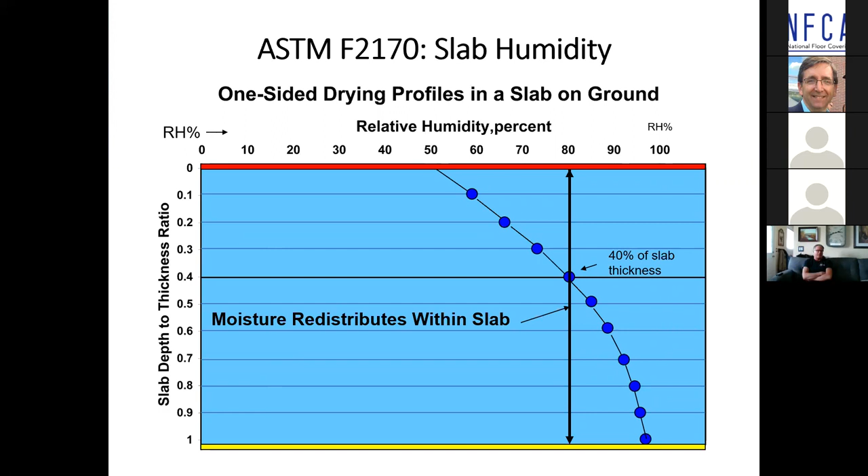Surface pH test, and this is a real difficult thing for me to talk about, because I and many of my colleagues on the ASTM committee believe that as a pre-installation test, pH testing is a flawed procedure. Why is that? Simply because we're introducing an external liquid source of water that may or may not develop in the concrete itself.

What is pH? It's the power of hydrogen. It basically is an indicator of acidity or alkalinity, on a 0 to 14 scale. It's not a measurement of the actual alkali content. There's a difference between pH and alkalinity. We don't have time to get into that discussion, but there is a difference.

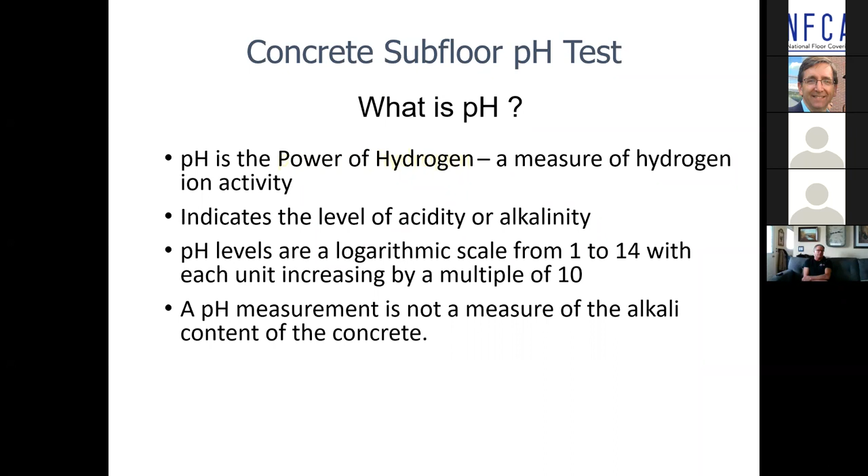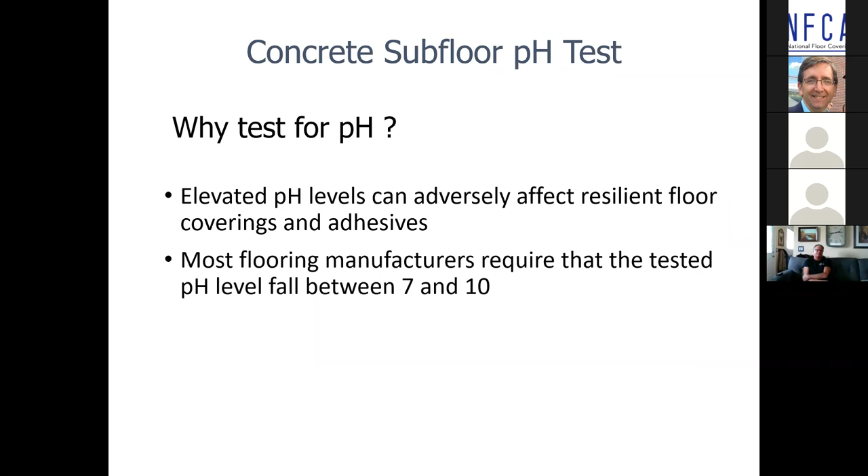Why test? Well, we test because there's no question that a high pH solution can break down adhesives and lead to flooring problems. No question about it. Most flooring manufacturers still require that it fall between 7 and 10. It's a measure of hydronium, hydrogen ions in solution. The point of that is if there's not enough moisture to create a solution, pH is not an issue.

If I take that pH strip and put it on the top of my desk and don't add water, I have no pH at all. If I put it on a concrete slab and I don't add water, there's no pH.

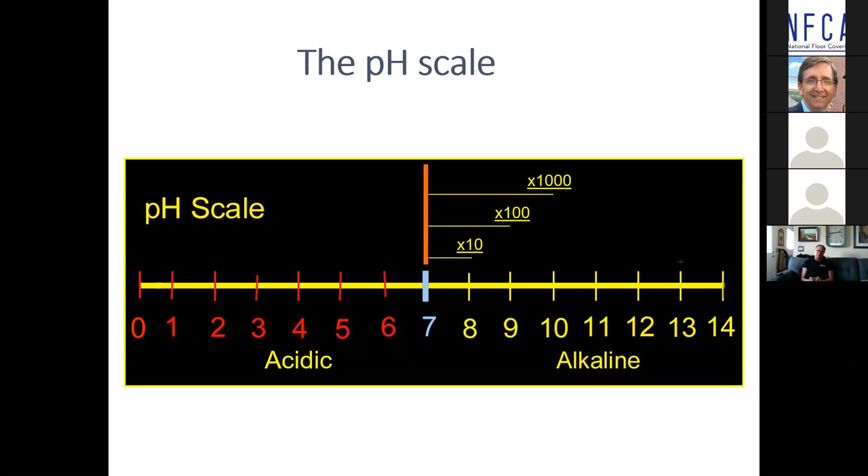We talked about it being a 0 to 14 scale. Distilled water, deionized water, pH is 7, but it's a logarithmic scale. When you go from 7 to 10, you're talking a concentration difference of 1,000 times. Concrete, when it comes down the chute, is always going to test—fresh concrete is going to test to 10, 12, 12 and a half, 13.

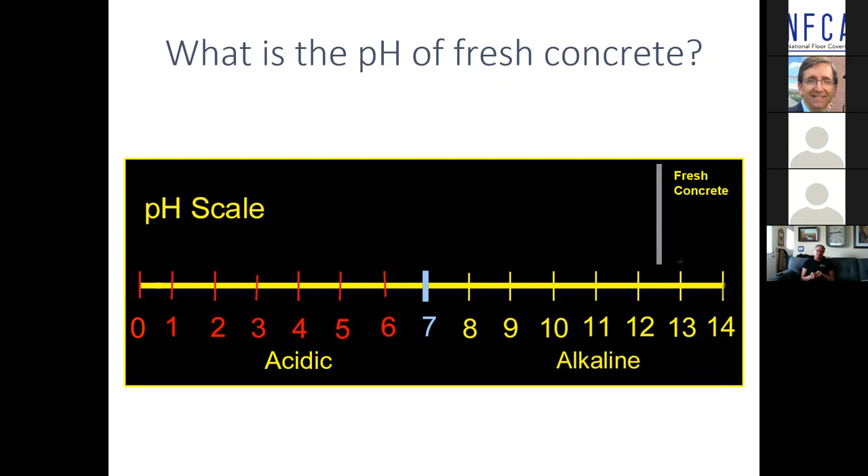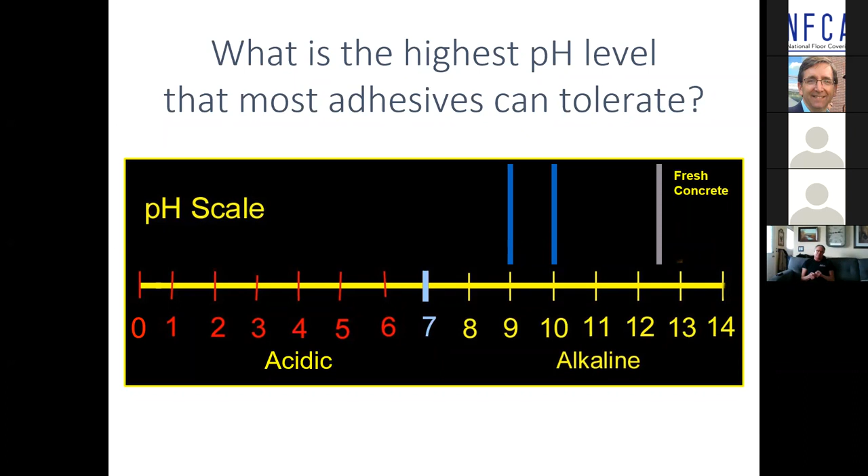What's the highest pH level? With most manufacturers, 9 to 10. So what's wrong with that picture? How can we have flooring adhesives that can only tolerate pH levels of 9, 10 going down over concrete, which, without apology, would measure fresh concrete at 12 and a half and 13?

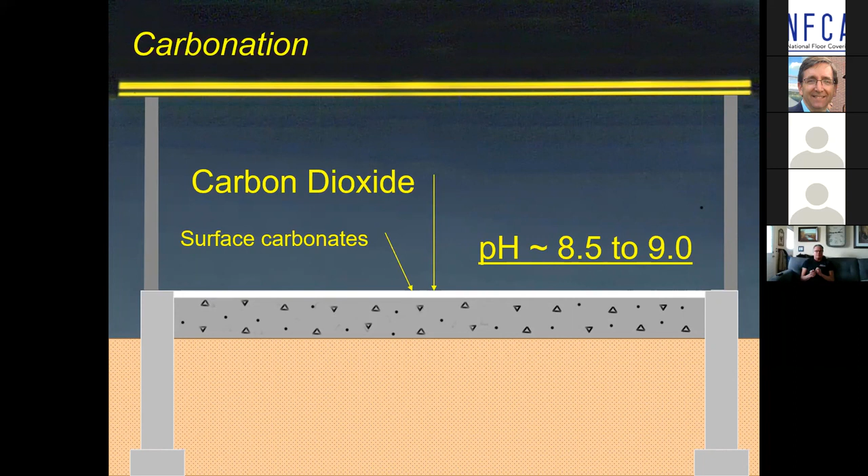Everybody is counting on, and everybody's right, that a bare concrete surface exposed to the atmosphere will experience a degree of carbonation. Chemically speaking, CO2 reacts with moisture H2O, forms a mild form of carbonic acid, which in turn creates calcium carbonate. It lowers the pH to about 8.5 to 9. Okay, perfect—that's what we want, until we come in and put down the floor covering.

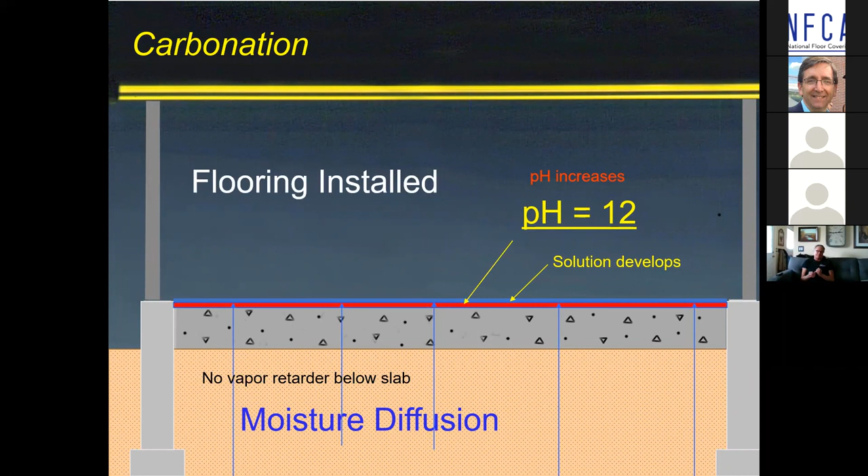Pre-installation, as I warned you, we are actually, I believe, very close at ASTM to removing the requirement in ASTM F710. We're going to move discussion of pre-installation pH testing to the appendices. They may ultimately develop a test procedure.

As a forensic tool, it's invaluable. When I go on a floor covering failure and I lift up the flooring and there's fluid, and you conduct a pH test, it tells you what the adhesive is actually experiencing. Invaluable. Please don't get the idea that I'm saying pH testing isn't valuable.

I'm saying that as a pre-installation procedure, it's flawed in the sense that we're introducing an external source of liquid water that may or may not actually develop. So we're working on a new procedure that simulates what's going to happen, and that ultimately will hopefully be developed to the point that we can talk about pre-installation pH testing. But be warned, it's a valuable tool for forensic investigations.

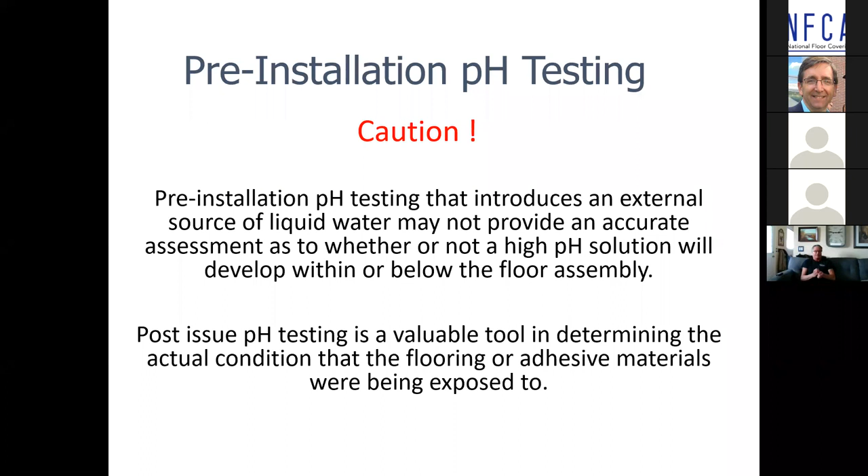pH, no question—high pH solutions can break down water-based adhesives, can actually attack any type of adhesive over a longer period of time. So will the love-hate relationship between moisture and concrete slabs end anytime soon? I don't think so, probably not. But by having a better understanding of the relationship between the two and how to deal with it, it may help all of us keep from having to learn about that fourth type of concrete: legal crete.

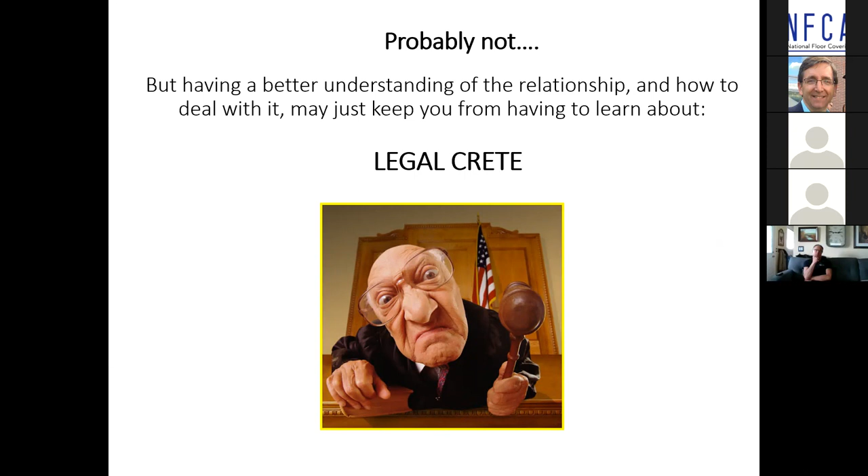All right, Chris, you want to bring us back to the questions? Terrific. Great information, Peter, as usual. Thank you so much.